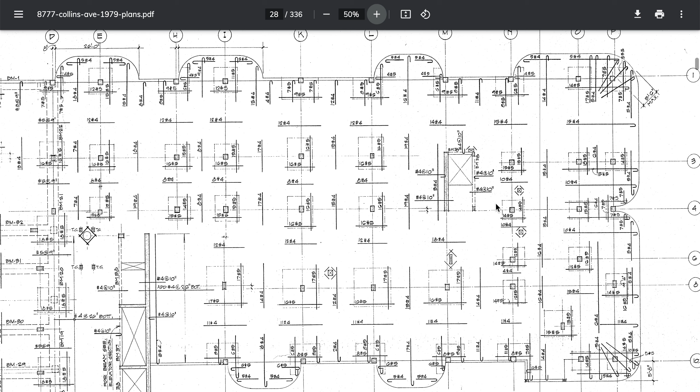Maybe you're the best at wanting to search and rescue someone, pulling them out of a building, but in a pile of debris, in this situation, especially with the lady that died back there when they showed rescuing her and the fire happened—you didn't predict how to protect her against a fire, you didn't predict how to get her oxygen in case something went south. So there's room for improvement, isn't there, in being the best in the world?

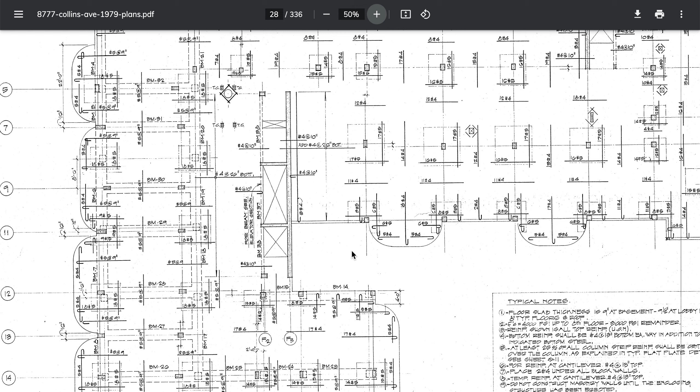So no, I am attacking the idea of being called the best in the world. If you can't predict that the person first needs to get them air—and I think I did a video on it, or I talked to another engineer on the phone.

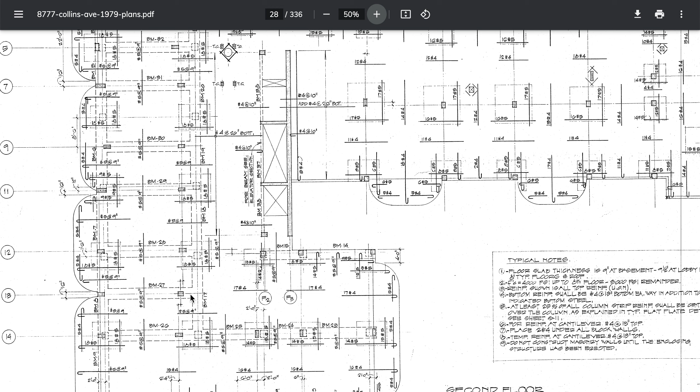Look, the first thing they do when they have a cave-in at mines is not trying to recover the people or just start digging. The first thing they say is, let's get them oxygen, let's get them water, and let's get them food. So they'll dig a hole to get to that location just to get them those life-sustaining things—oxygen, water, and food. They'll get them that, and everything else is secondary.

It may take them weeks to recover these people at a secondary shaft to get to them. We have a person here, they just go at it, and the person dies as a result of a fire that they couldn't predict—it's unpredictable to them. The best in the world couldn't predict that a fire might happen, and you're not following the ABCs: airway, breathing, circulation. The airway is critical. So let's maintain that person's airway however we can. And if that includes keeping the rubble from falling down on them, that's maintaining airway.

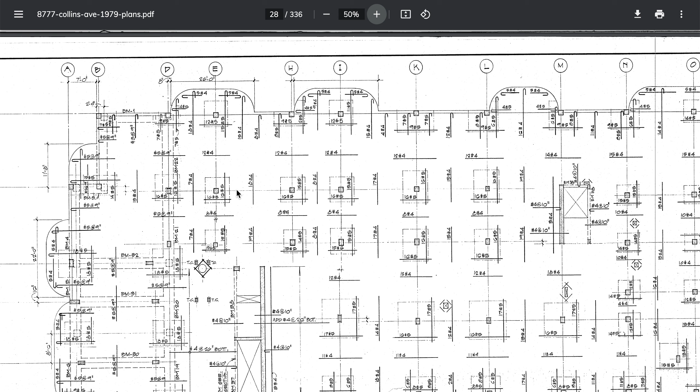So I find it very disingenuous of the municipality to brag about being the best. And then we have zero people recovered that didn't require minor access—meaning just bring the lift up and take them off a ledge. They saved themselves. Just so people would know, I would be dead if I was in this building.

The lady who is the model—I would be dead like her, because when that building separated and she saw the wall open up, I would be dead too, because I would be looking out the window, evaluating it, trying to figure out what's going on there.

Oh, check that out. Look at the crack on the outside facade here. Huh, where's the moment happening on this? Let me grab my tape measure. Let me go get my level.

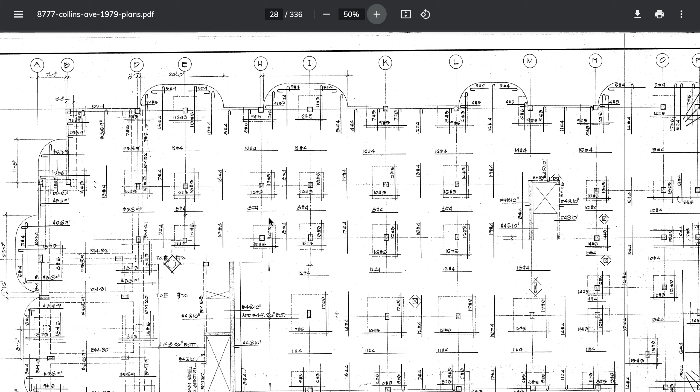So I might have made it into the hallways. I went to go grab my level and tape measure from the car, but coming back up, I would have been dead had I been in this building. I would not have run and escaped. I would have been back trying to evaluate, and I would have heard the building coming down on me, and thought, apparently the building's pancaking. I don't know if I'd have known it was pancaking at the time. I would have just said, oh, that's not going to end well.

So that's that one. Now, the disingenuous demolition is that this structure, I think, was stable, and the debris, yes, is a danger of falling down on people, but that doesn't stop the recovery effort over here. I think they use this excuse to use federal and state funds to say the building was unsound, unsafe to continue the rescue, not the recovery. Because in the recovery, they're like, no, you get no money for recovery. But if you label it as a rescue, well, emergency funds still kick in, and we'll let you demo the building on our tab.

So Surfside gets to push it forward to the state or the federal government. And no sooner is the building down on the ground, within hours later, they say, you know what, they're all dead, this is a recovery at this point, we're sad to say. So it's so effing disingenuous of Surfside to do that, to try to pretend like it's recovery. I think this was a financial decision.

Also, I think their head engineer, yes, I saw his work, beautiful work, some of it is, in a few places, his company's work, not his work. But it's disingenuous for him to say he would have his family move into the other building without knowing why this building failed, and they're sister buildings. So are they set up the same? And so it'd be disingenuous if you don't know why this one failed.

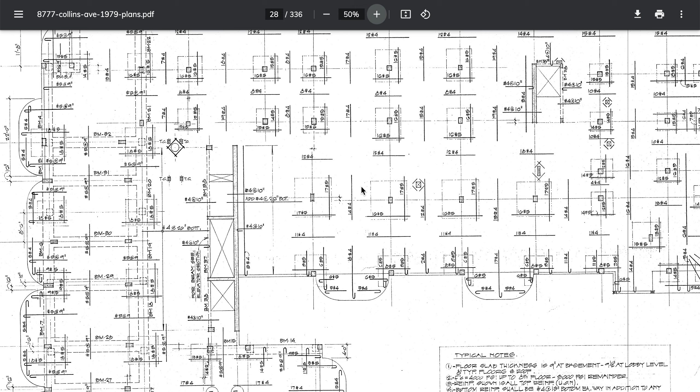With that said, show me where all the new sales happen in condos right now. Show me how many people might be completing the condo sale because they're under contract. But show me how many people have backed out now, and then show me how many new contracts have happened in Surfside since this took place. Specifically that building, the twin sister, how many properties are sold or put under contract after this accident? So don't try to gaslight me. You'll just get it thrown back in your face.

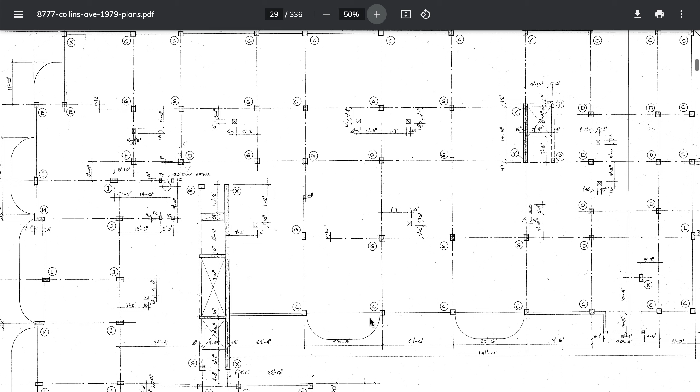So now, again, this is disingenuous. We're going to go over the steel here, but before we do that, not in this video, we're going to talk about my bias that I have the splitting deck right about here, the butterfly. I have to consider internally that it started and worked its way out. My butterfly is an option. We have to consider the repairs that they stated and that were required, 28, 29.

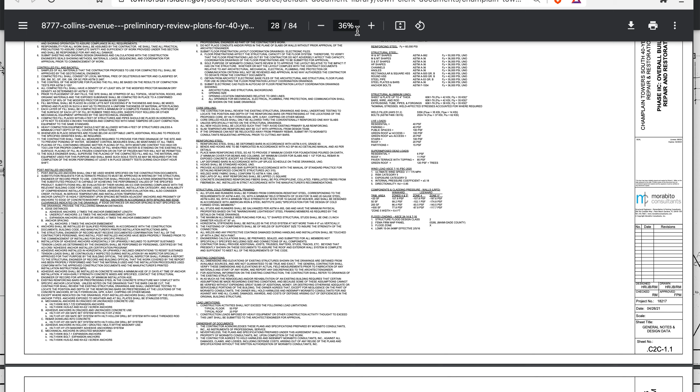Hold on, looking at my notes. So we have to consider the structural repairs right here that you see that they were going to require, where the structural repairs were located. Obviously they set it up where they're between two, and we can probably try to figure this out. If this was to scale for sure, we'd be able to figure it out. There's a scale. We'd be able to figure out where exactly these beams are and figure out the intent of the repair there. Let me go to 20, that's 28, so I'll go to 39.

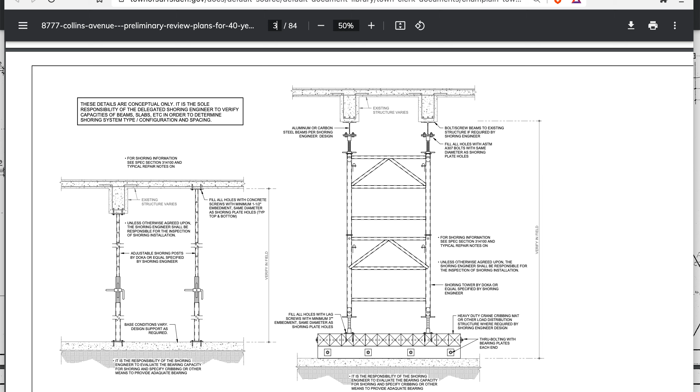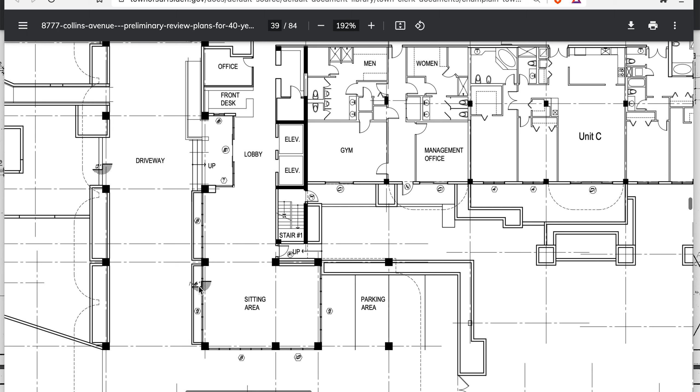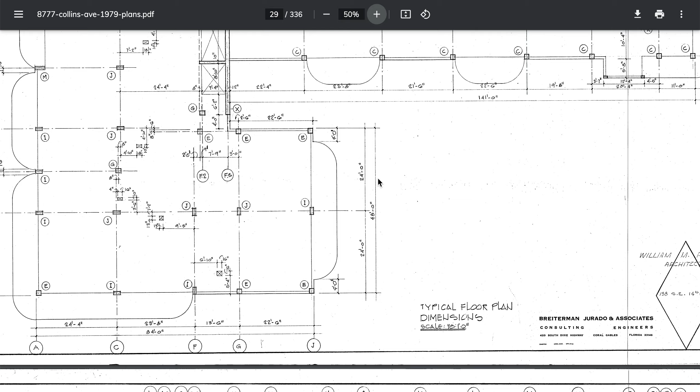So back to here, new data is showing that there's no connection between the deck and this outside wall. So no connection between this column, these columns where there's supposed to be some 5 by 12s connecting into the pad to this outside wall - they're not present. So that's one of my inside sources. I'll say that much to give it some credibility.

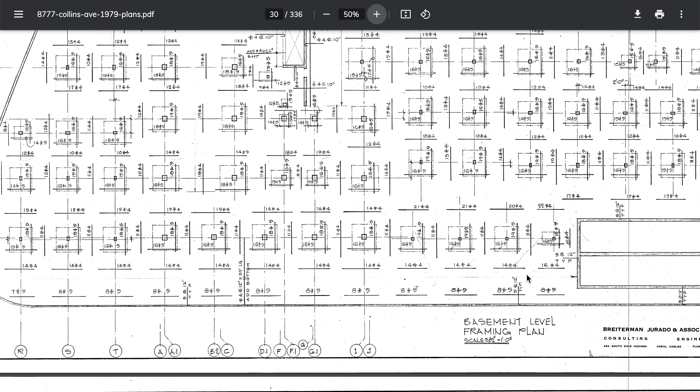You're never going to get my inside source. It's not going to happen, so you can just pass on that. As I said with the FIU bridge collapse, when I made the comments about what really took place in those meetings, I said, look, any lawyer watching this, you're wasting your time. You can subpoena me all you want, go to jail, contempt of court, and I'm not giving you my source. I'd rather go to jail and probably do a video from jail.

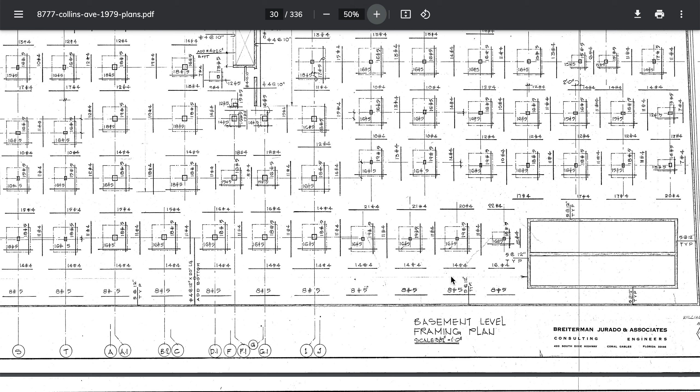So it's not going to happen. If you want to know about this, you don't need to worry about my source. You can just question the so open-minded Surfside mayor and the engineer there. Was there securement in this outer wall to this wall here?

Now was there, and where are the images from here? In other words, this could start - this being an overhang at that point, considering there's no shelf there that it was tied onto - this being an overhang, we could get an easy failure in this overhang from this column to here to start our wave from here. That wave would start where it's impacting cars, landing on top, and it would give me my false bias right about here, where I say the butterfly would happen.

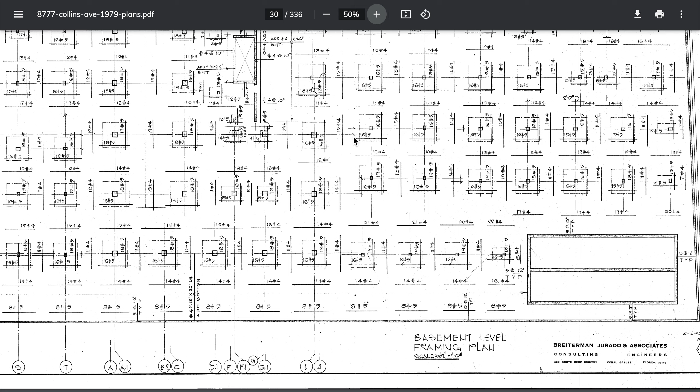With that said, if this breaks first from here to here, okay, let's visualize. Sorry about not changing the mouse color, I forgot. So I need a column - a side view of a column.

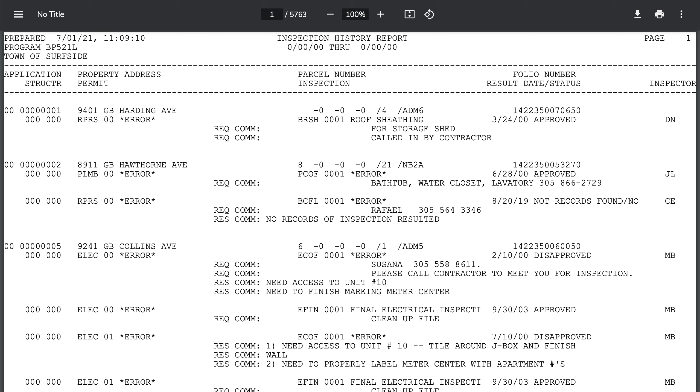Hold on, so concrete column. Let's just try this - images. Bear with me. So concrete column, all right, let's use... cantilever. I love the spelling correction on this, I just tap and fix it.

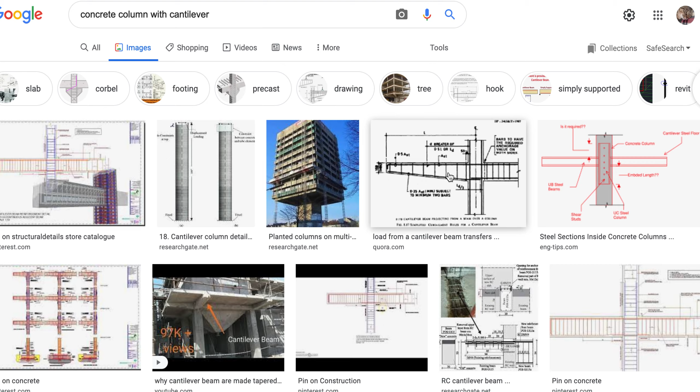Let's do that. So this is what a cantilever would look like if you did design it where it wasn't anchored in there with the reinforcement, which this states it is anchored right here, anchored into the wall, 5/8 at 12 inch on center, typical. So now this is really a cantilever, but you can see it's larger here. It's got the stirrups. This deck appears to be of the same dimensions, but no cantilever, and there's no column going above it - so it's just flat.

So now let's imagine if I can push down on this, I create compression here. If I push down on the load of it, the dead load wants to shear, but being out here, it wants to create a rotation - counterclockwise rotation over here, which puts the top part in tension and this in compression. So this part not being there, we would want to see a tension break somewhere about the top of this, but that's where the column is, and it punched around it. Whoa, look at that thing.

That would help you try to identify it, but they're not. I didn't see anybody trying to get down to the base layer of this thing. It looks like everybody's just walking on top of the pile where we see pavers - this type of clay paver it looks like almost - and then we have the concrete bed. So the other data I have is there's also a sand bed there, pretty heavy sand bed.

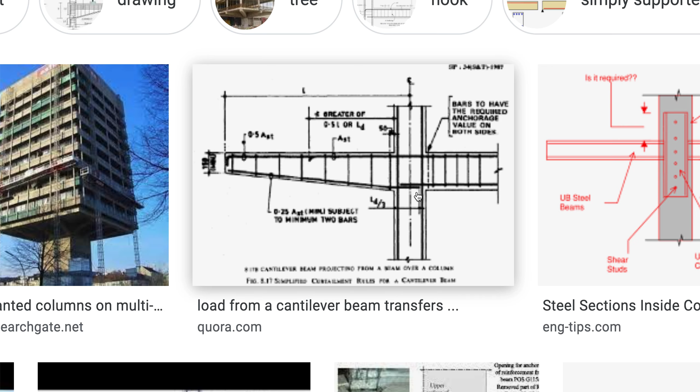I don't want to say the amount of thickness because maybe the person or persons that contacted me spoke of the amount to someone else, and that would triangulate back to that person. So I will not give details like that because the devil's in the details if you're trying to trap somebody and figure out who's saying what.

I want the sources to keep giving me source material, and I want to share it with you guys, because that's the intent of the people sharing with me now, that they want the truth out there because the truth's not getting out there. So these type of videos going forward will probably be source related.

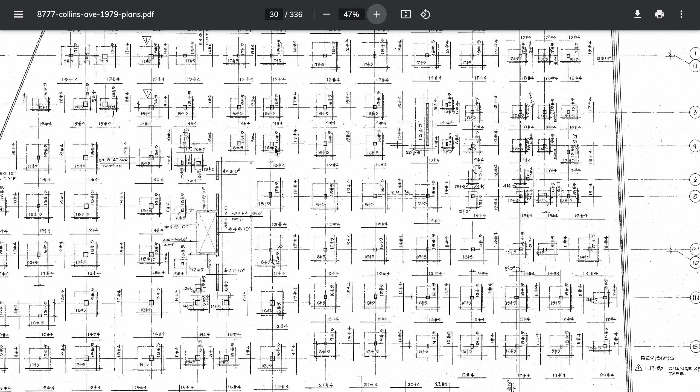They will maybe not be backed up with imagery, but they might be. But they'll be backed up with correlating locations and thought processes.

As far as the building goes, that's my narrative on this building versus Hard Rock Hotel, and why they probably federally wanted to bring it down, and why they said. So you can debunk me on that if you want. And why I think they wanted to still call it a recovery mission because of the federal money being available, and a rescue mission.

No sooner is the building on the fucking ground, it becomes a recovery. No, they're all dead, we're gonna recover. Incidentally, like I said, I'd be one of the dead ones. I'd be dead as fuck, squashed up, no good.

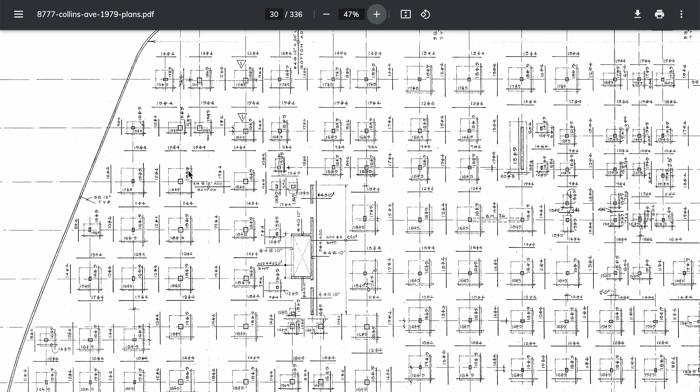Sorry for the insensitivity if some family members are watching, but I want you to know that my skill set would not have saved me. I would have been worse. So the lady that made the phone calls, the people that staggered, I would have been one of them, but purposely staying there looking. So the data would not have told me to run at that point. My mind would have told me to evaluate.

Now, current day, I have a new conclusive file. My data would say, oh my gosh, I wish I could take a photograph of that before I run. But my data would say, oh, I've got to run out of the building. So my data also tells me now not to buy a condo.

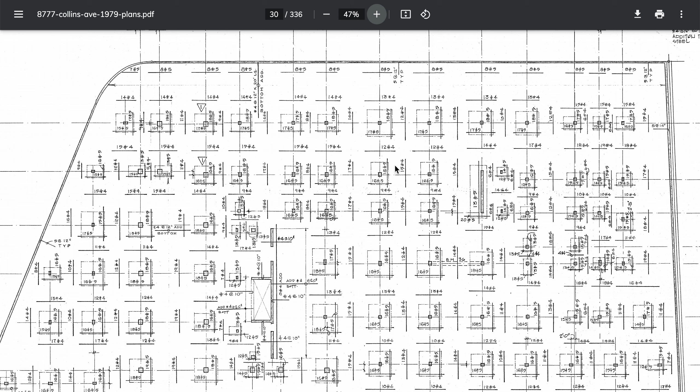With that said, Fontainebleau, located in Panama City — I've had a crush on this building for years, but every time I come back, it's still the same issues, which are spalling concrete, etc. Every time I come back to look at the pricing of it. It's only about 7 stories or something like that, set up like that.

But where they bring complementary images, they're very small. There we go. So they've got this going on. So hostile illegal takeover images, what's this say? This is Fontainebleau. It sucks.

This structure is surviving in spite of itself. So if you want to talk about taking down a structure or condemning a structure, to the municipality down there in Panama City — you look no further than to evaluate this for structural issues. This thing has got chunks of concrete missing in multiple places.

Where are some more pictures? In multiple places, and this is the tension side of it. So that spalling, we could say the span created, the tension is showing there, and it's spalling, popping it off under whatever loads are above it, and it's got it on the outside too.

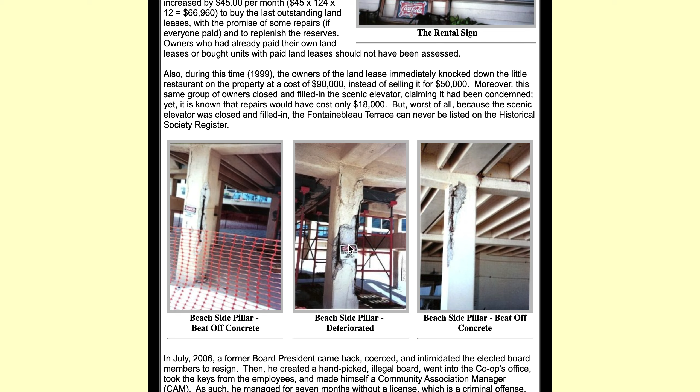So the governor of Florida, if you want to look at a building that you want to send some of your people to, send them to Fontainebleau. I don't know, let's see — visit site. They actually say Fontainebleau, Panama City.

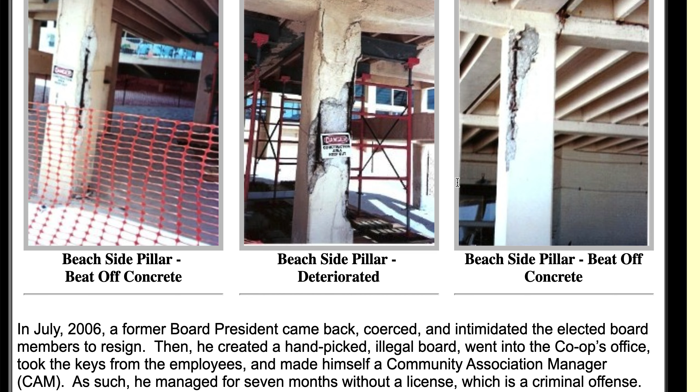Yeah, here we go. Yes, send them there. Last I looked, this was still status quo. This is an old article, but I was there about 2 or 3 years ago, and it looked like this. I was like, oh no, can't buy it.

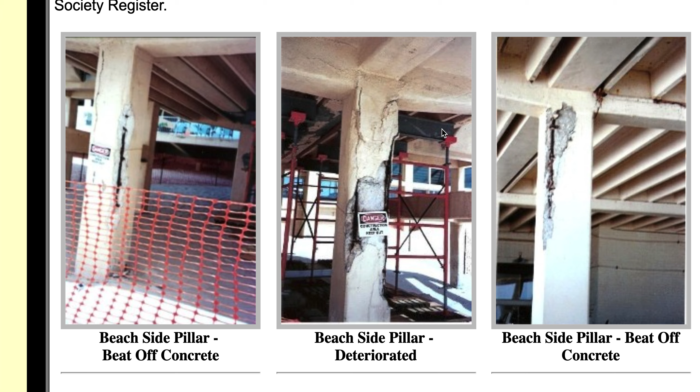Actually, I don't remember any supports there. There's some steel supports, but nevertheless, you see they got some temporary supports in this one. They didn't have it in that image. They didn't have that at this structure.

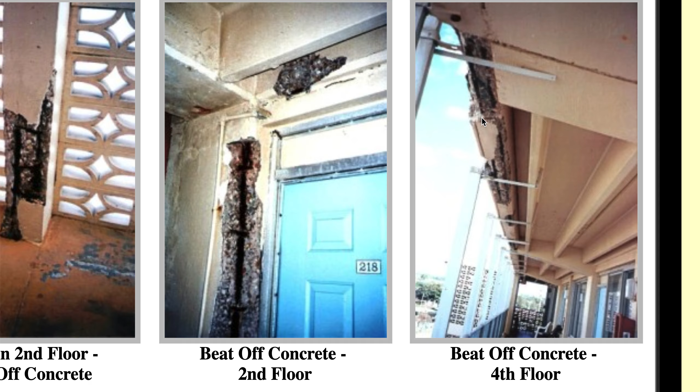I'm ending the video with — look at this, it's just disgusting. That's gotten worse. I'm ending the video with, yeah, don't stay in places like this. Don't forget that's a rusted staircase.

Don't stay in places like this. Bail out, call it quits. I don't care about real estate values when it comes down to that life risk stuff. All right, perfect timing. Take care, guys, bye.